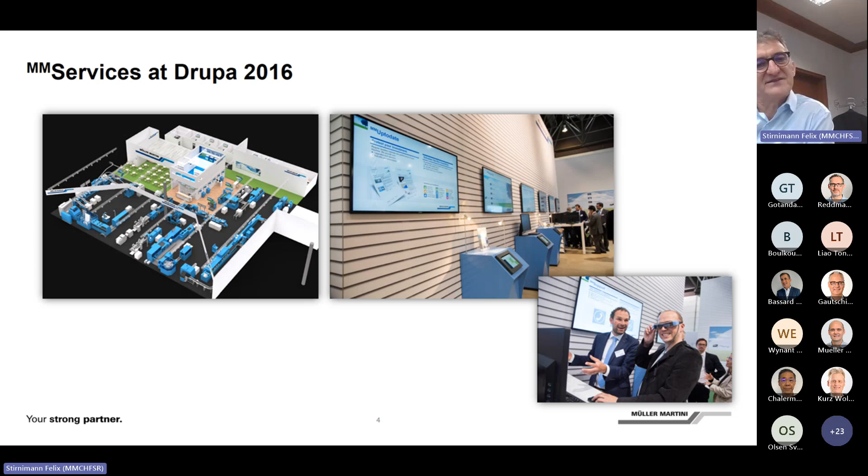Nowadays, we are close to 45% of our business, of the total revenue, what we do in services. So it's something that really is important for our business. Because of that, we invested heavily over the last couple of years.

When you look, we have this chart, this service journey table here. I have it hanging here on the side in my office, and you can't read it. But you see that since 2010, every year we had new inventions that we introduced, new products, new solutions, new tools, new processes. And this was all combined with a lot of investments that we did just to make our product, our services, our structure and processes better.

And this was all to follow our vision that we want to become a first-class service for the graphic arts industry. This is our vision, that's what we want to be. And then we have as well, on the other side, a promise of MMServices that we can say to our customer that our focus is on your success, and we help you to maintain your productivity over the long term.

And this we trained, and it was backed with our service excellence program, our services commitment that we developed together with our service engineers and with the whole service force, where we said we have 4 bullet points there. We said we need to have satisfied customers, we have a strong relationship, we are the expert and have the know-how, and we understand that service is a business.

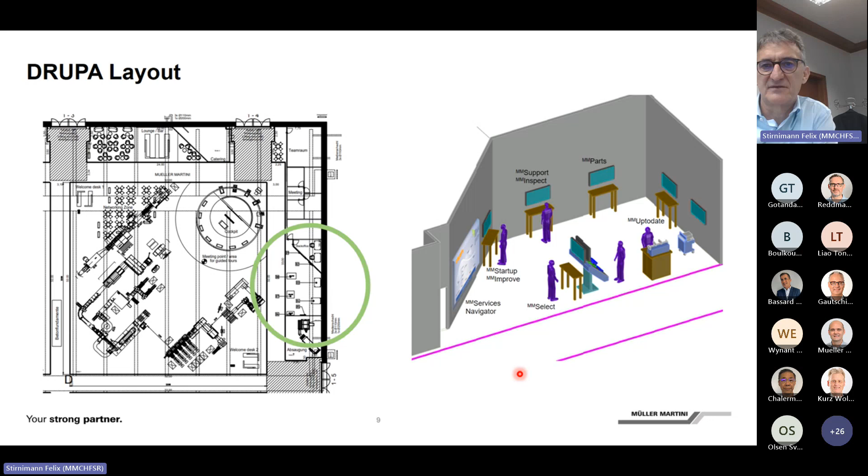And then as a final position, you have Select as well, where we want to close business or generate business. That will be the post then to do that. Here to show what we can do, and then here to generate business. Now we have a new slightly adapted navigator, as you can see. And the navigator still consists of our hills, the 3 hills that we have here, and all the products. It has now the life cycle management, we have the MPOWER in it. And on top, it has our vision, our customer promise in services that we have listed here.

Maybe just that you understand the logic of this chart. We have here a curve going up and down, and this shows the capability, the output, the quality capability of our machines, and after a startup and installation, how it is rising. It shows the various products that we have along the life cycle, the major products. And then we know that at a certain time, the capability of our machines is dropping.

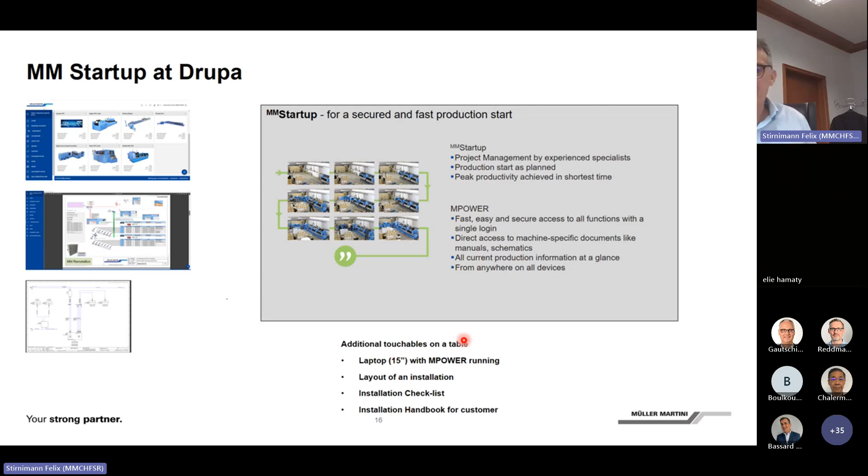And with that, I would go on to the next label, that's MMImprove. Here as well, the customer side. What keeps the customer awake at night in terms of training? Next year, I will have 2 operators retiring. Ooh. What needs to be done to get more out of my line?

So they are searching people all the time. They have a lot of people coming in. They have to train them. They have questions how to bring more out of the line, or will they find someone to run this really old machine like that? So the question is, how can I keep Leo on my 25-year-old binder? Because he's really my best binder operator.

And now the answer is clear. Buy a new machine, make it more sexy, make it more productive, such a binding line. When you bought this line, then the question is, can Leo handle this new PublicaPro technology? It's really a new investment. So how can he handle that? And will he bring out 100,000 books a shift already in April? Because that's what I sold, that's what I planned for.

So there are a lot of questions around the capability of the people running the machine. Now, here again, what is our approach to do that? And with that, I will switch over to Christoph. We swap places here.

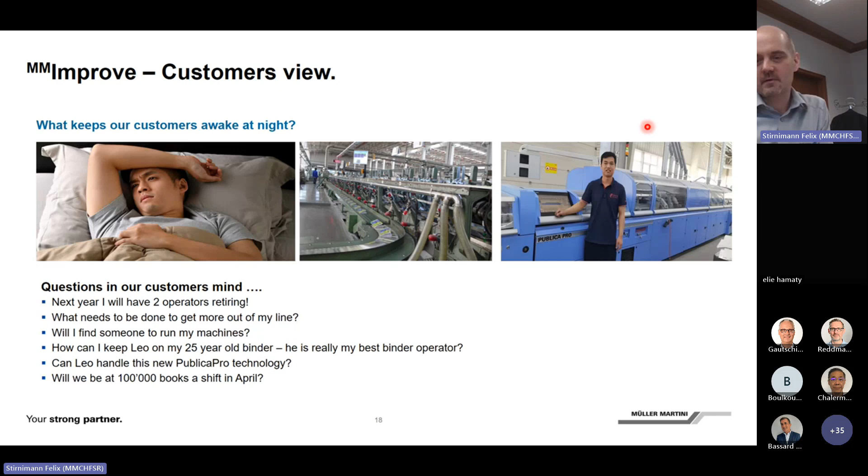Okay, what do we have for MMImprove? What is our approach? We are ready for training, demos, and tests in the new print finishing center. Let's take a look at this.

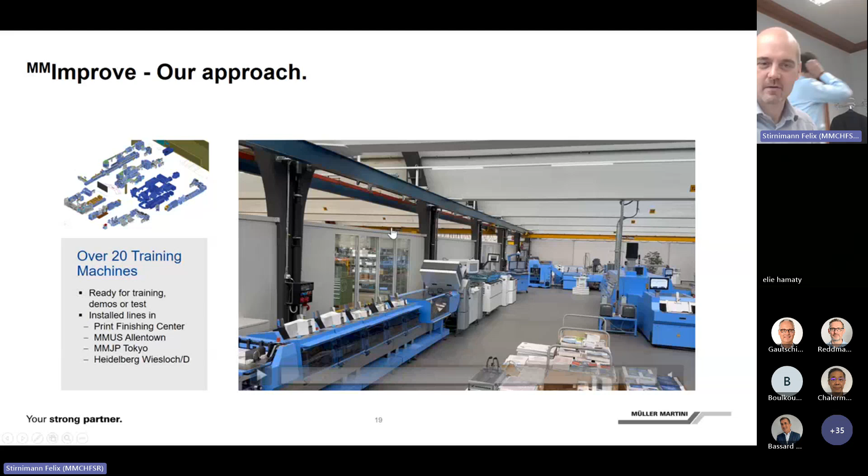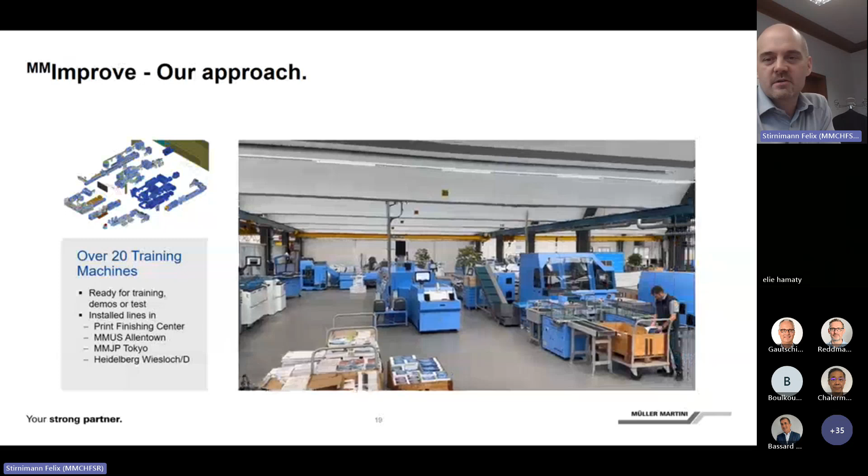Let's take a look into our new print finishing center with all the lines which are installed. We have more than 20 machines in our training centers. They are installed in the print finishing center in Zofingen, which we see here, at MMUS in Allentown, Müller Martini Japan in Tokyo, and as well we have a machine in the Print Media Center of Heidelberg in Wiesloch, Germany.

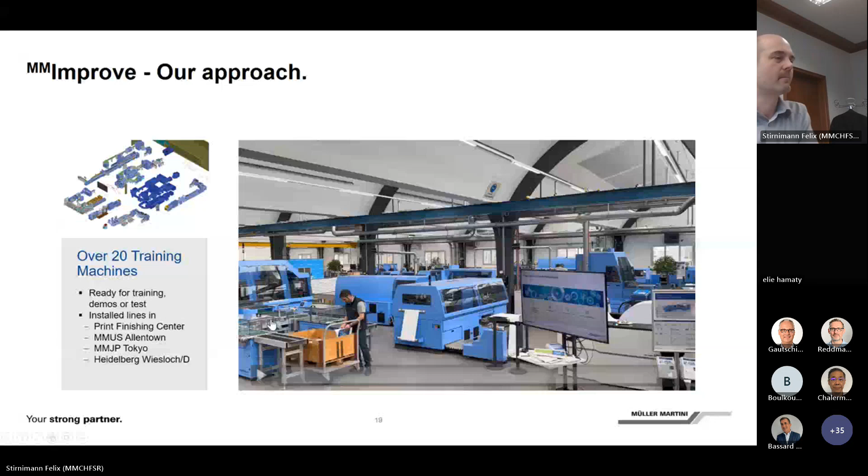We have a lot of experienced trainers, over 10 full-time instructors in Switzerland and Germany. The average experience is more than 25 years. So if we look at the age of a saddle stitcher in Germany, I think the average over there is the same as the experience of our trainers.

We have a modular training block, one for customers and the other one for Müller Martini engineers and agents. We have a fixed pricing for the training in the print finishing center. This is 500 Swiss francs per day and person.

If we look at the modular training block, for the customer, we have the basic operator training. That's just to build the base on a certain machine. And then if he needs to get deeper and get more experience, we also have the advanced operator training. But we always start with the basic, even if a customer already had a saddle stitcher, because on the basic operator training, you get to know the basics of your new machine.

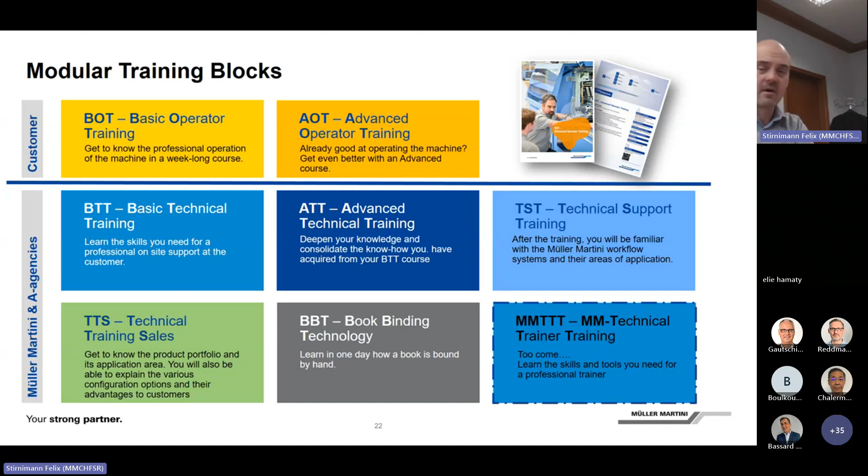And to come is the Müller Martini technical trainer training. This we want to bring up to train our local trainers, or the trainers around the world who do more trainings, so that they can deepen their knowledge and also understand what is important to bring over in a training class.

We have a streamlined training process, so you are well prepared for the training. It's a structured weekly training program. We also do a feedback loop, so you get a feedback form at the end of the training and a certificate for the participants.

So we see over here we have the training course invitation and confirmation, the schedule on the back side. There's a welcome package for everyone who joins the training here at the Print Finishing Center in Zofingen. Then they receive a feedback form which they have to fill out in order to check if we can do anything better. And last but not least, the training certificate of the specified training.

If you look at the print finishing center, we have a very nice infrastructure over here. We have separate and clean areas where we can go back and do theory blocks, as well as the practical blocks on the machine. It's clean, it's organized. It's not a production environment where the people have to run away. So we can really take time and look at certain things.

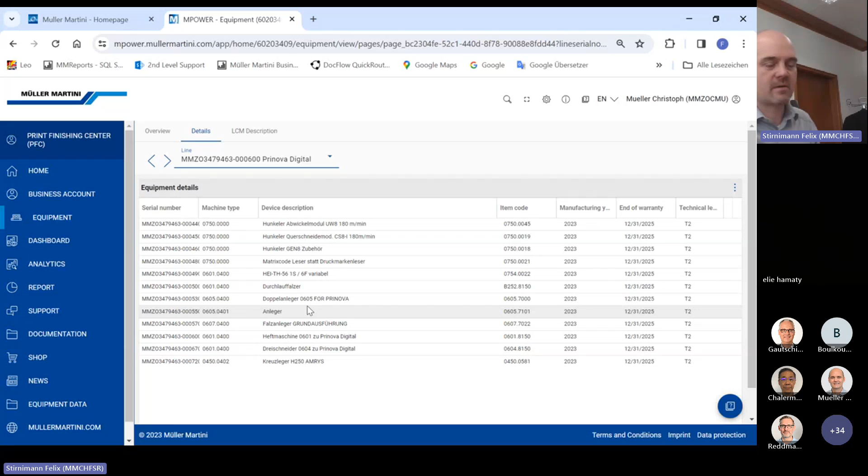Then we have the end of warranty and the life cycle status. That's all displayed per machine or per line. Under details, I find a list of information, what I have. Let's take a look at Connex. Under Connex, I see all the licenses which the customer has. Or let's go to the Prinova Digital. Over here, we even have the Hunkeler Unwinder, the Hunkeler Crosscutter, and the Heidelberg folding machine. So we exactly see what models or stations consist in this line.

As well, we have the document which was already shown by Felix to begin with the service navigator, so the lifecycle management sheet where the customer also sees the waves with the life cycles below and what they mean. What does secured mean in case of MM support or up to date and so on. So it's a clear communication between Müller Martini and the customer. We don't hide anything. So whenever we change a life cycle of a machine, he will see right away the next day that his life cycle changed. So we have nothing to hide.

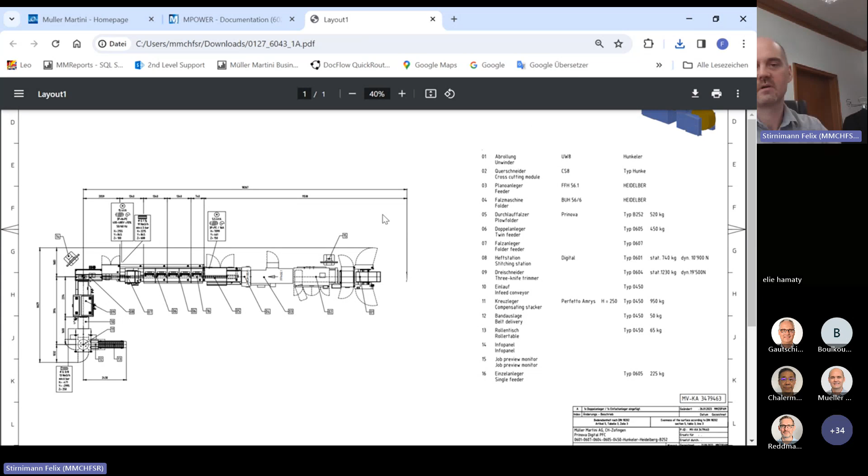Then let's go down to documentation down here. Under documentation, I would like to start with layout. Under layout, we have the assembly layout of the machine. We have two buttons over here. One is opening up right now in the browser, directly here. Or on the right side, I can also download the file as a PDF. Download it. It will be available on the downloads, or I simply click on it, and then I have it. So that's the layout of the Prinova Digital assembly layout.

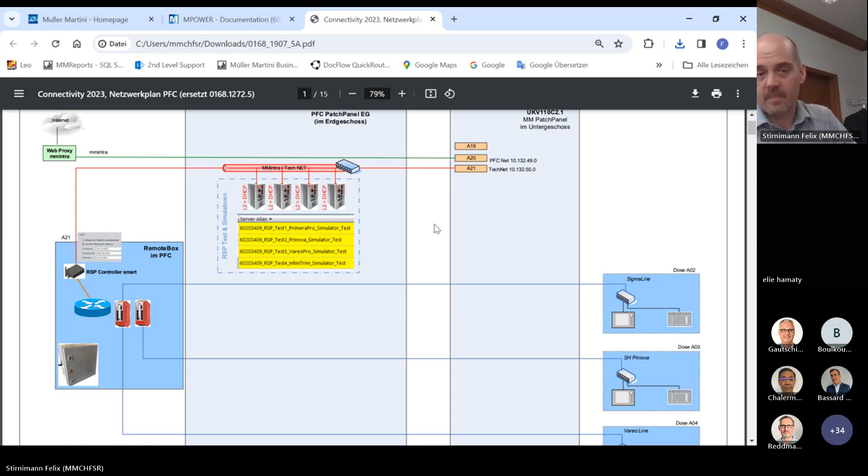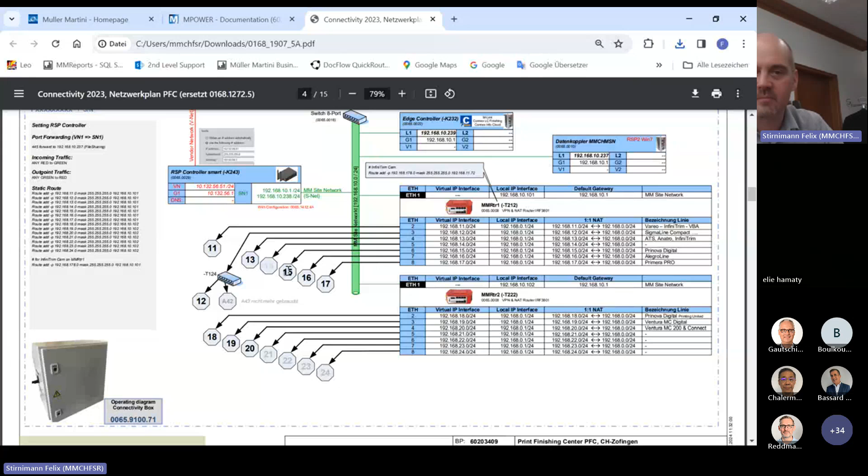Most important these days for service reasons is definitely the network diagram, because in the network diagram I find all details how the machines are connected or what are the IP addresses. So we have an overview here with all the network blocks. Then in the connectivity box over here with the firewall router, which machine is connected to where. So we want to take a look at the Prinova Digital on page 9. Let's go there. 9 here, Prinova Digital.

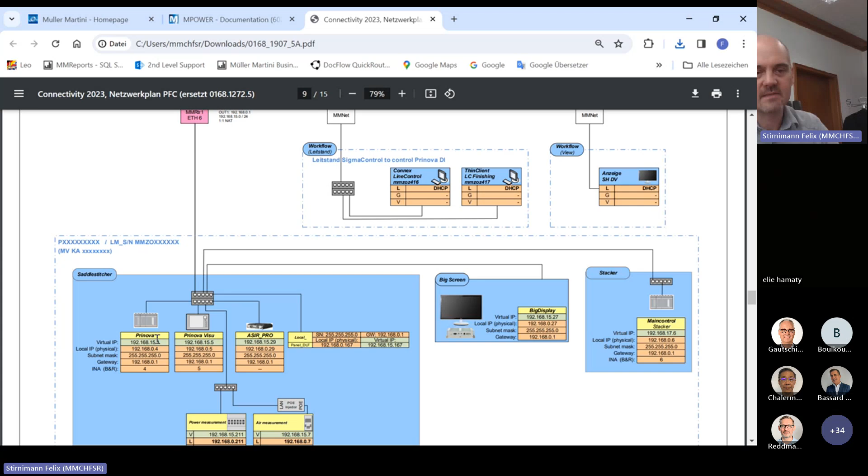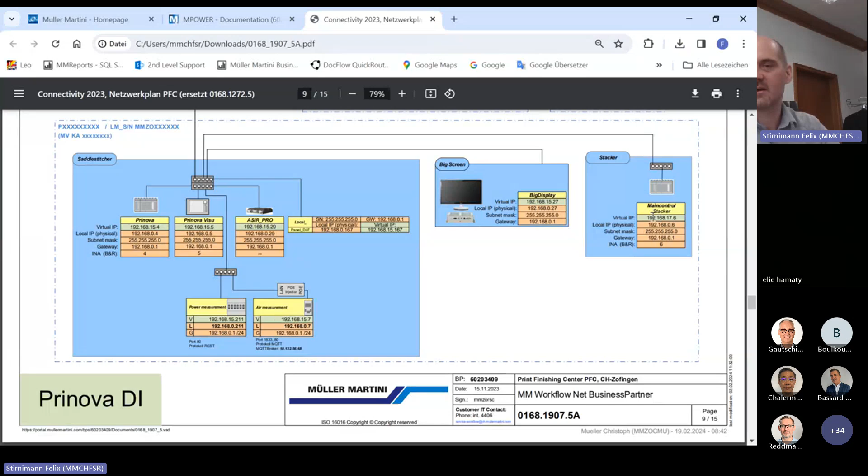There we see all IP addresses of the Prinova, of the main terminal, the ASIR Pro. We also see that we have a power measurement and the air measurement tool where we measure the power and the air consumption on this machine. The info panel and the other machine, the stacker, Perfetto in our case, with its corresponding IP address.

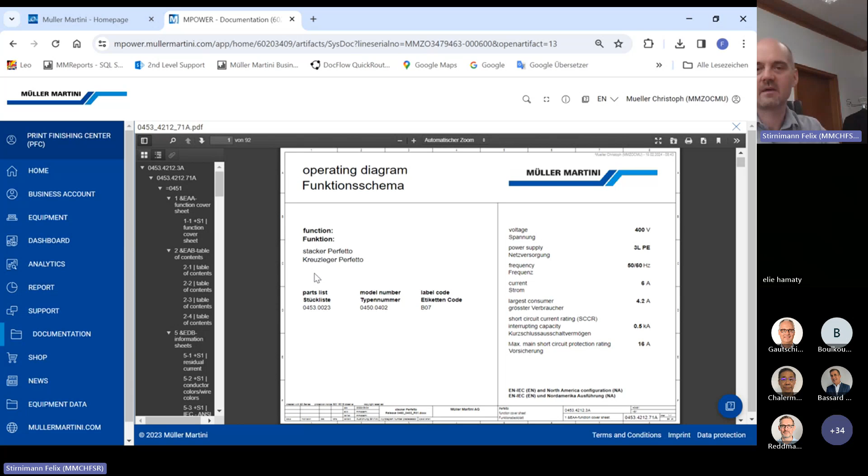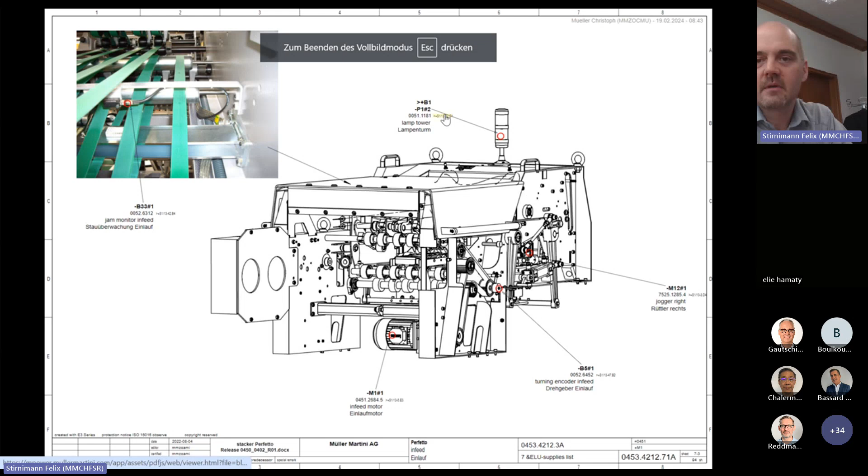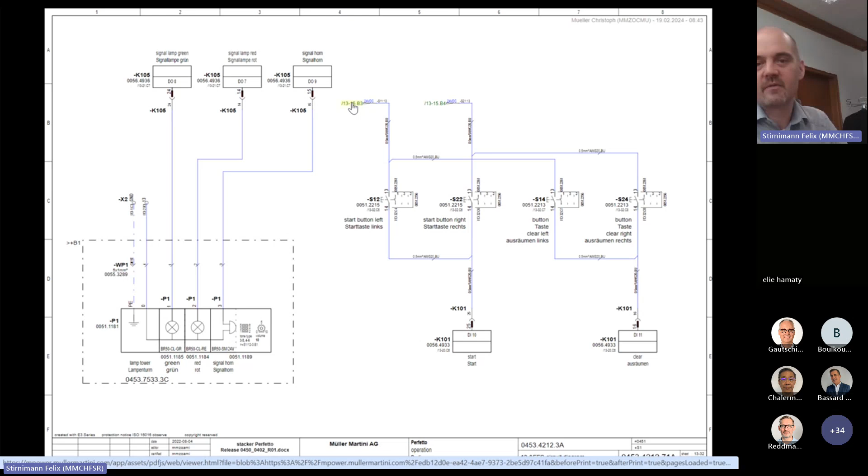Under schematics, we have all schematics for this line, so for the saddle stitcher and as well the stacker. Let me open that up this way. There we have the schematic of the stacker. And do this one, make it a little bigger. Then we can jump because I want to check the light bulb of the stacker here. And then I get right to here. And there I have the information about the green light and the red light and the number for the light bulb or the entire lamp as well. So with all these, you can jump somewhere to get to the corresponding part. Good, that's the schematic.

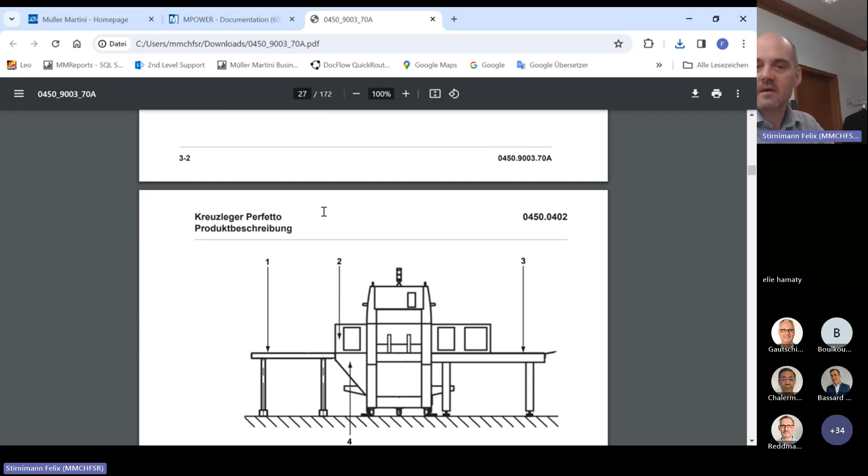Then let's go to the manuals. Under the manuals, I have the corresponding manuals for that machine, as well the Prinova itself or the stacker. Let me open up the stacker. This time I download it again. You see you have the two possibilities. You can download and it opens up the PDF in a separate browser, or you can open it directly in the MPOWER browser.

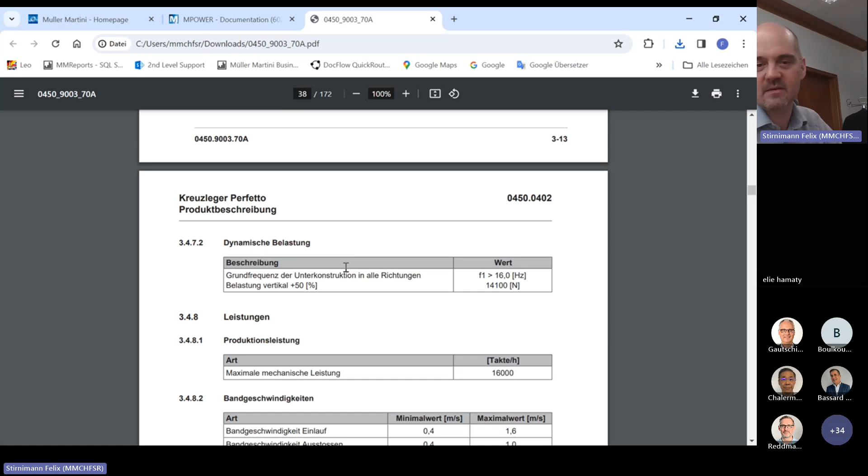The description about the serial numbers and so on. The corresponding manual in the correct language of the customer. In our case, the print finishing center is in Switzerland, we speak German. That's why we have the corresponding German manual of the Perfetto over here. Good. Then let me close this one as well.

Now I would like to show you spare parts documents. And for this reason, I log out real quick as my account, and I log in as a customer, as the print finishing center. And then I real quick explain the differences. That's a customer login.

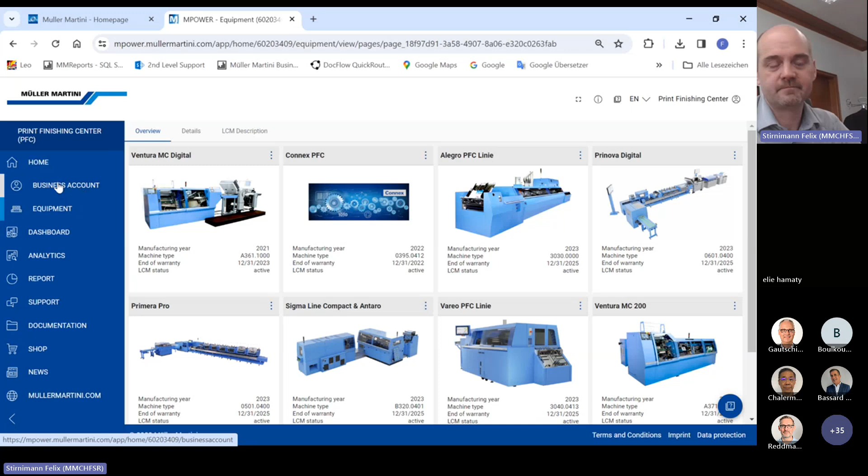Okay, over here you see I don't have the overview of all machines. I just have it here under equipment. That's the same, but I don't see which machines I had. I just have the overview of my installed base right now. Then on the business account, this is the same. I see the users which I have, and the rest looks pretty much the same.

Let's go down to documentation, and I select again the Prinova Digital, go to the spare parts, and we now open here on the Stitcher. Over here I have two different spare parts catalogs. One is the old one. Let me open that up real quick for you, so that you see how this looked. That was just a normal PDF. It was quite hard to find the correct part in here, because you need to know where to go first in order to figure out what you're looking for.

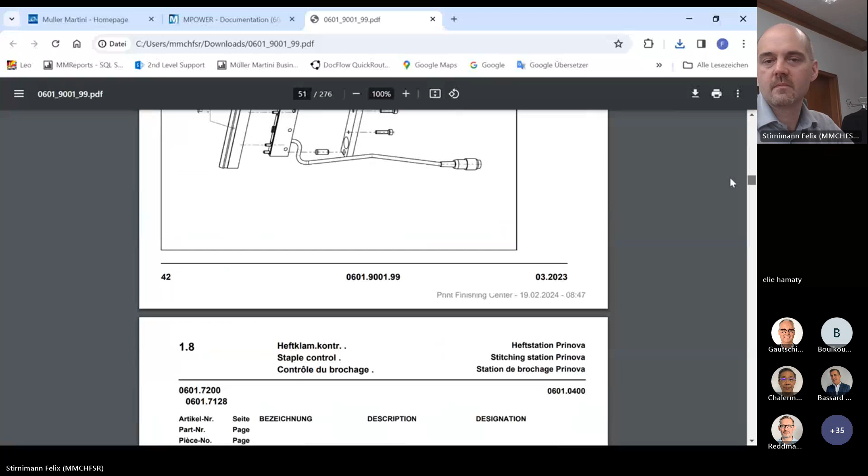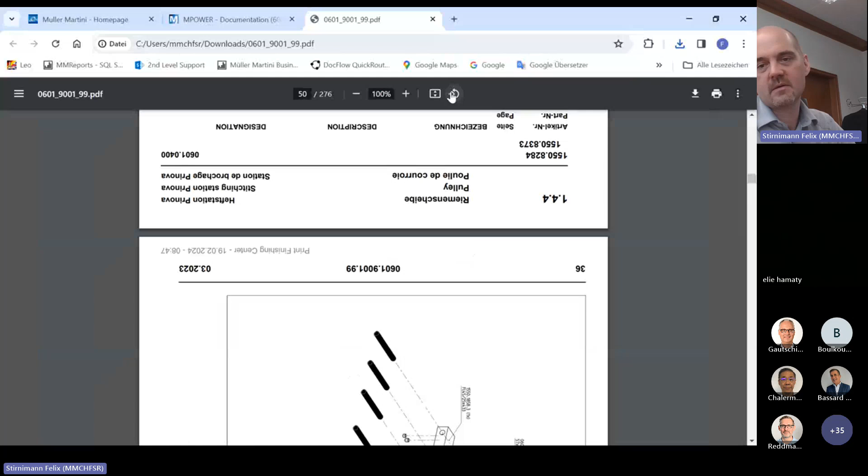And then you can see many of the drawings are turned, so you need to turn them. Now I just turned it the wrong way. So it's quite hard to figure out the part, and you need to think about that part, note it somewhere, in order that you can order it. Okay, let me close that.

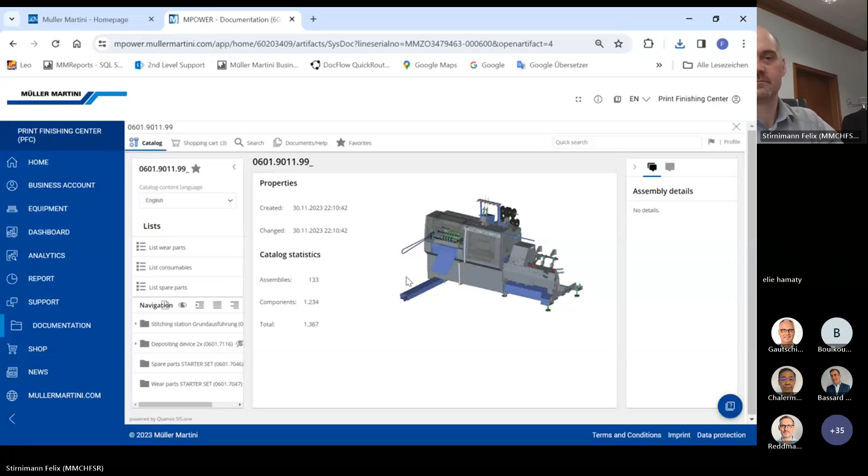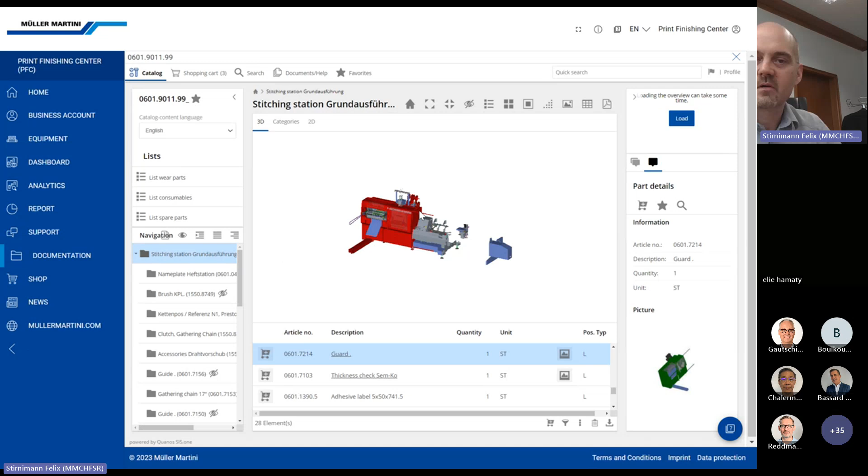I open now this 3D spare parts catalog of the stitching unit, and I make full screen view. Now, if I'm looking for something, if I need to remove covers over here because I can't find that part, I simply click over here. Good. Then I know it's below there. Remove the cover. That's what I'm looking for. I want that scale.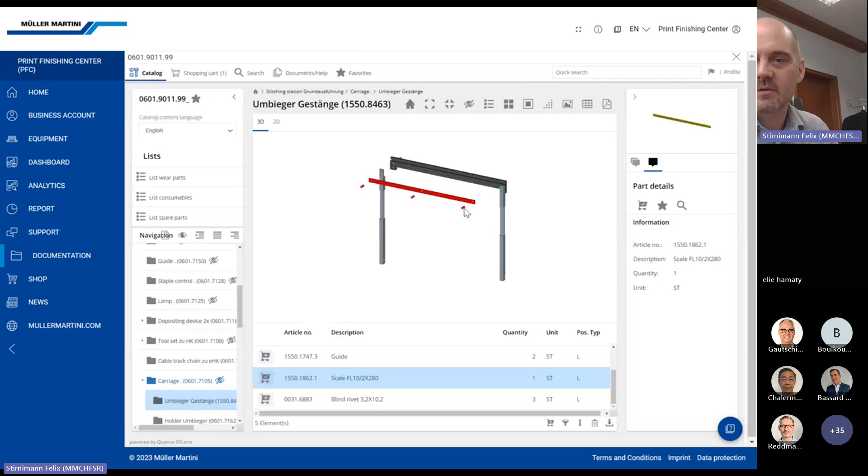Add to the shopping cart. Oh, I have already one in there. Let me first delete my shopping cart, so we can start from scratch. Okay, let's go back to the catalog. So I want to add this. Then I want to add these rivets.

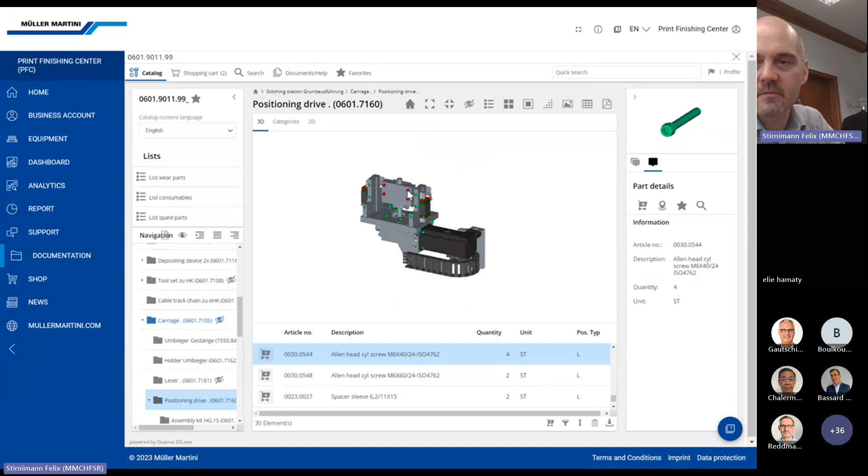But then I can go back. And maybe I just order these screws. Then I say I only want one. Add. Now I have it here in my shopping cart, all the parts I added. I can say save to eShop. Then I go to the eShop.

And this you can only do if you're a customer. With your login, you will be able to save it to a shopping cart, but you won't be able to import the data on the eShop because you're not a customer. Now I have this import data where I can choose a file. So select here. Then it goes into downloads of your PC. Downloads, over here it is. Shopping cart as an XML. You can select it, open, and then upload.

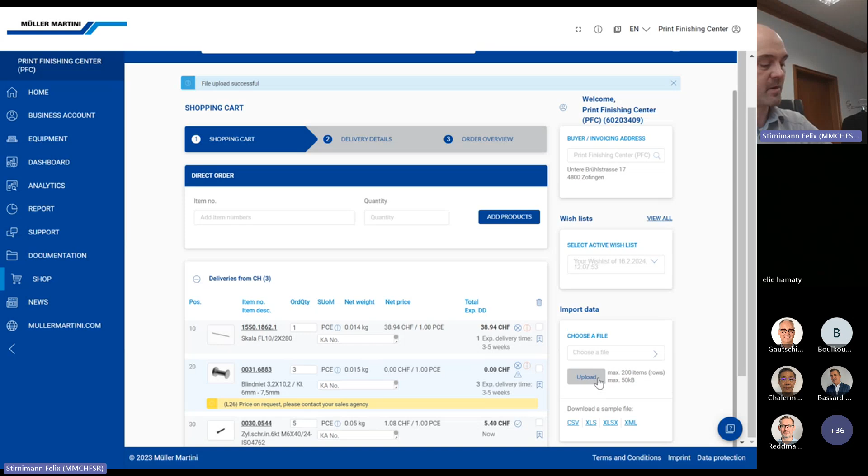Now it's checking the availability of these parts. And we can see it here. The scale, that's the unit price. Expected delivery time, 3 to 5 weeks. Why don't we have this scale? The reason is simple, because this scale is not a spare part. We use that daily once we build up a Prinova Digital, so we have it in our production stock room.

And then it will change. If you order it or if you call, you will figure out that we have that part available and we can deliver it right away. So it won't take 3 to 5 weeks, but it's not a spare part. It's not in our spare parts office.

Then the rivet pin over here, we have the information: price on request, please contact your sales agency. It doesn't make sense that you order that, because you need a rivet tool to put that in. And this rivet tool the customer usually doesn't have, but our service engineer does. So our service engineer would bring this rivet tool and then would be able to exchange the scale.

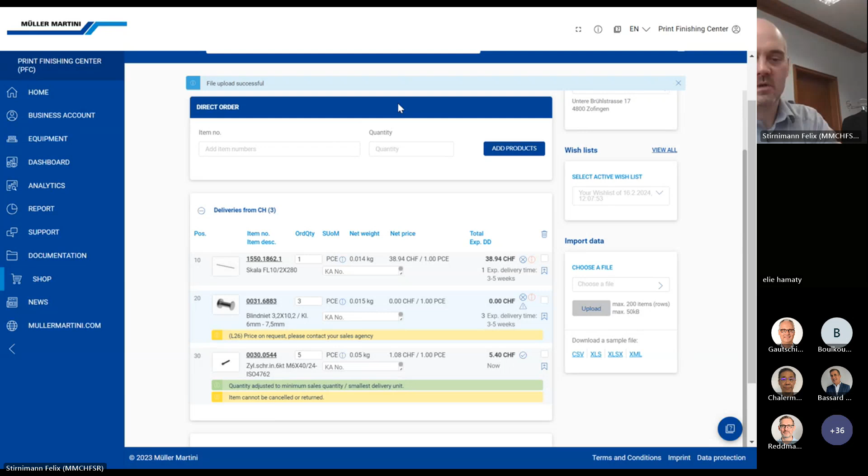On the screws over here, I only wanted to have one screw, but the quantity got adjusted to the minimum sales quantity. So I need to have 5 of those, and this item cannot be canceled or returned. Okay. That's on the eShop side. So we have the price, the delivery times, and uploading or import data. Import data and prices is only for customers. Then let me delete this shopping cart right away.

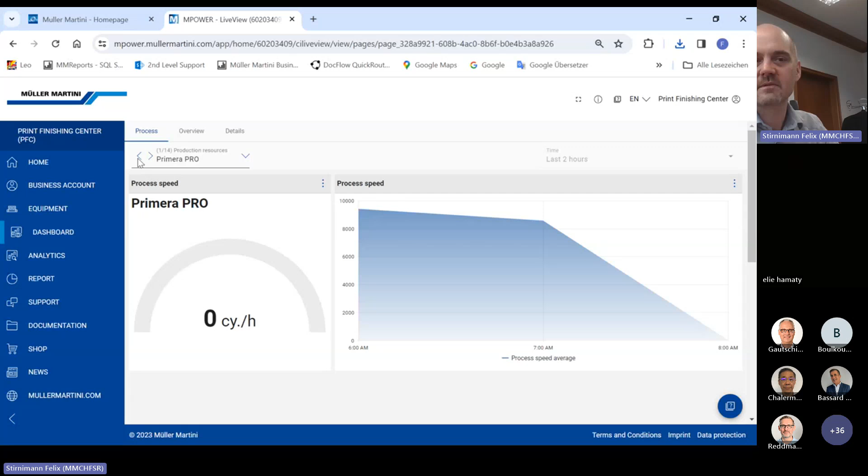And now I would like to show you as well in here our 3 modules which you have to purchase or where you need a license. Dashboard. This first one you get, because it just shows the process speed of a machine for the last 2 hours. In our case, the Primera Pro. You just see the speed of the last 2 hours.

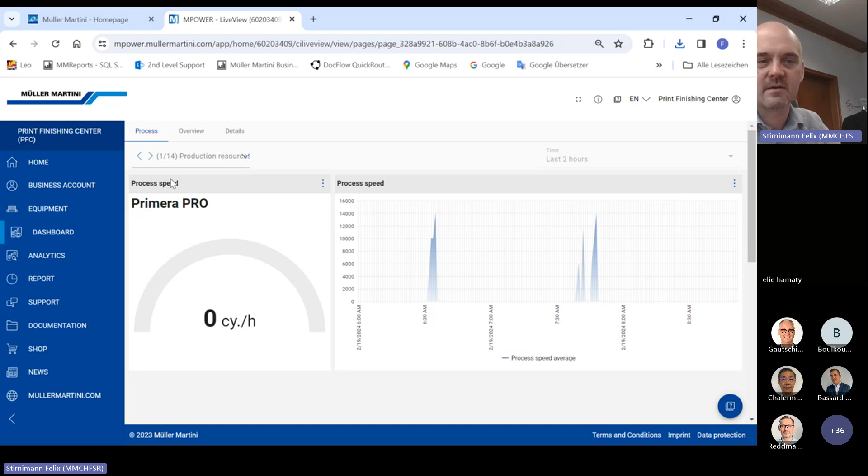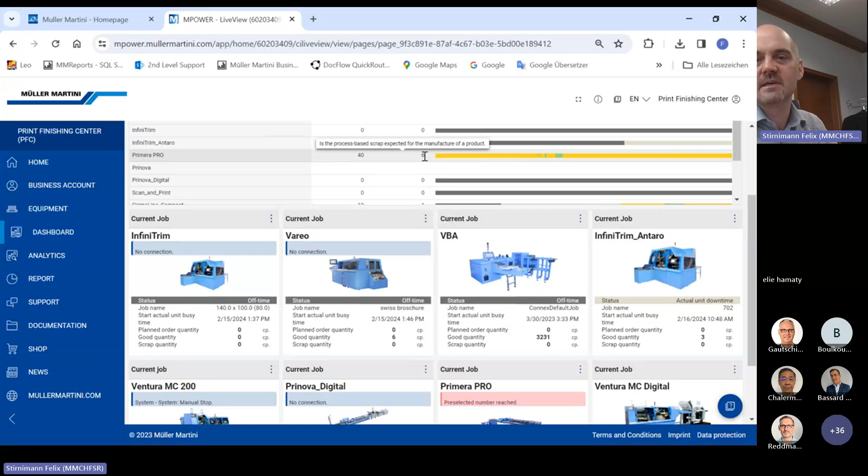Under the overview, you see the last hour of your plant, of all machines, of all production resources. You see what was going on. For example, here on the Primera Pro, the last hour, 40 produced, 6 waste. We have productive time and we have stop time. And as well, you have each machine in the details where you see the planned quantity, the good quantity, and the scrap quantity.

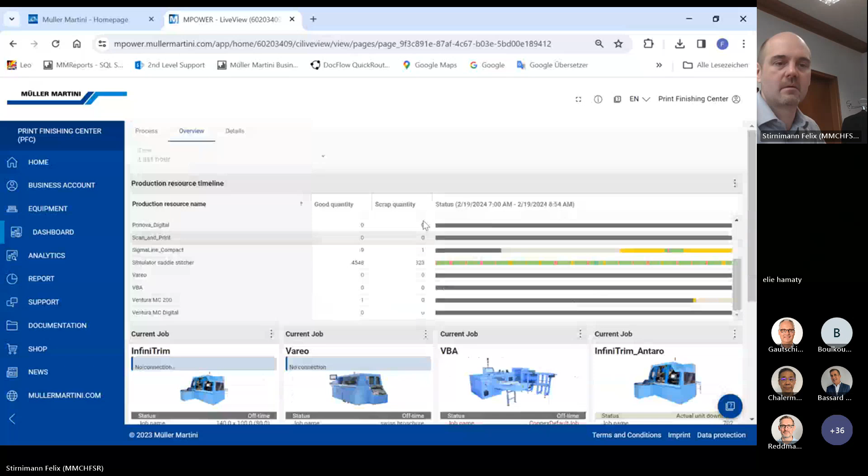On the details page, you have even more information about the machine from the last 12 hours. You can also select or change the machine or production resource you want to look at.

Let's go real quick to analytics. Under analytics, you can also analyze a machine. First we need to select one - let's take the Primera since we used that just before, and let's go to the last week. Over here we see the time accounts, the top faults, how many times they occurred, what was the duration. We see the top stops, the good quantity, speed classes, and so on.

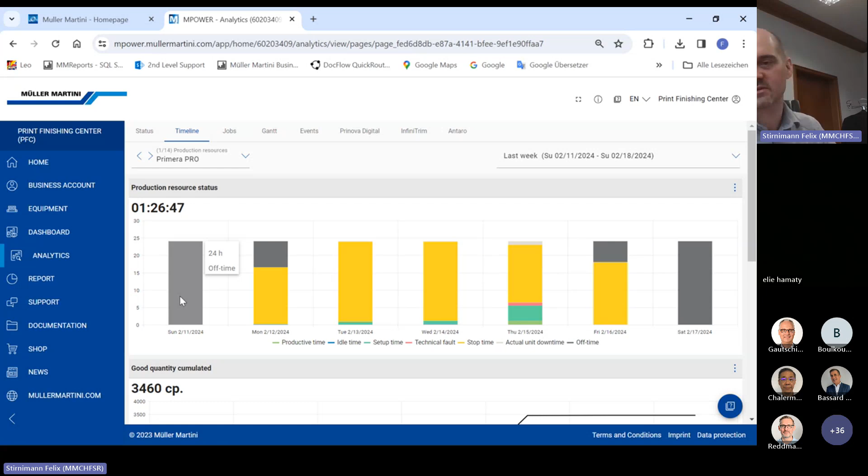There we have a lot of different views of each machine. For example, here the status within a week - when was it produced, when was the production, when was it stopped, when was it off. Unfortunately, on the weekend. The good quantity accumulated, and so on.

Last but not least, I would like to show you on the report - one report. Over here we have a couple different reports we can take a look at, but the one I'd like to show you is the trend report of this production line. The trend report shows us some important information - how we did in setup, how we did about technical availability, how we did regarding produced numbers, how we did about production performance, usage of the machine, and how we did in errors - did we get more errors or less errors, and so on.

Takes quite a while to download this. Very long, unfortunately. Now we got it.

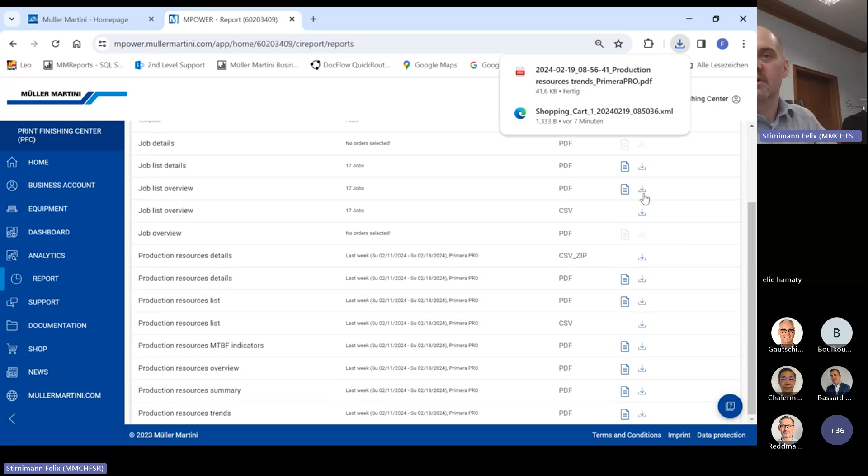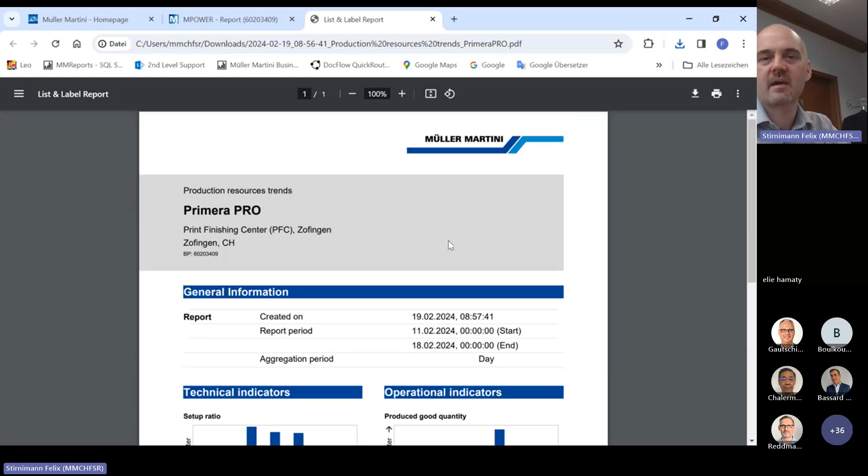So this is the trend report. I see when it was created, the reporting period. The aggregation period is per day. I see over here setup ratio, the technical availability, the produced good books - it's getting better. The production output is also getting better. The utilization efficiency is getting better. And the MTBF for faults is getting worse because it's trending down. So that's the information we have on this trend report. And as you can see, there are many other reports which we can generate.

Okay, that would be it from my live demo. Let me just log out over here, and then I'll hand over back to Felix. Close that all out.

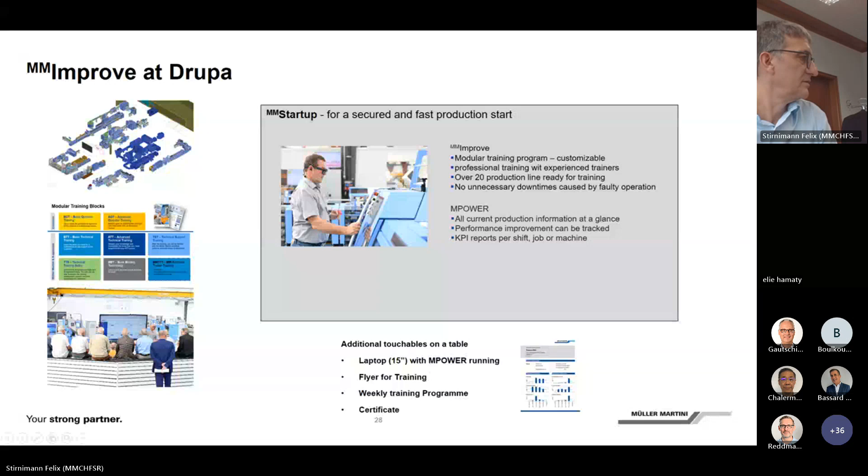Should appear, huh? Now it's coming up. Good. Very good. Thank you, Felix.

So now we are at the MMParts training for the Drupa 24. My name is Roland Gautschi, I'm the manager for parts. I will be supported by Marie-Therese Hilpert. She is responsible for eShop and pricing, and we will do this presentation together.

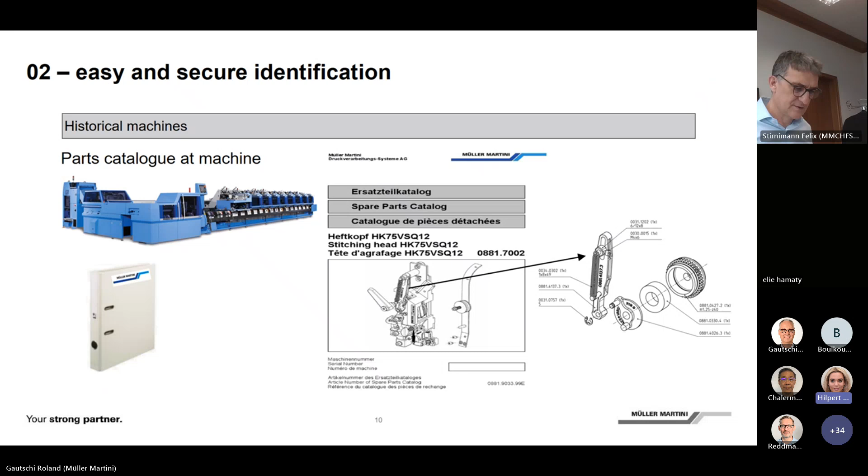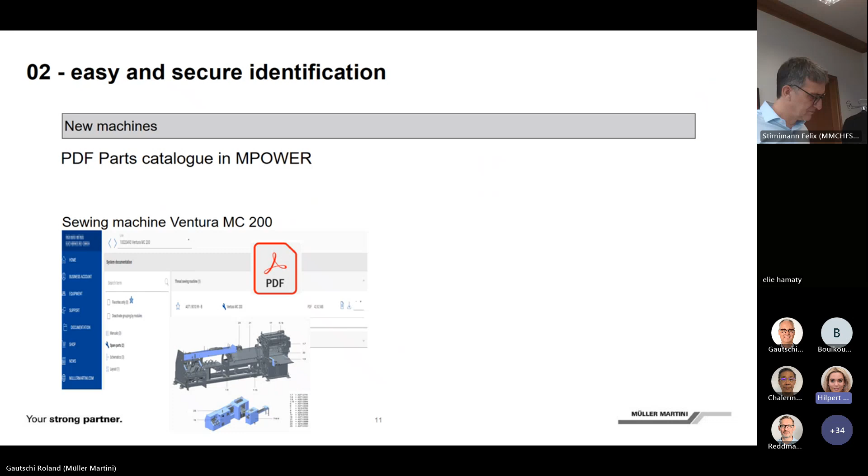The customer has several options regarding pictures to identify his required part. We have camera pictures, single as well as 360-degree pictures, and we will make these kinds of pictures for commercial parts as well as parts with high consumption. On the other hand, there are CAD rendered pictures, which will be taken for drawing parts with low consumption and low value parts such as screws and bolts. The customer also has the opportunity to download documentation for some parts.

Now, to show you more in detail, I will enter the eShop and show you a few pictures and the mentioned documentation.

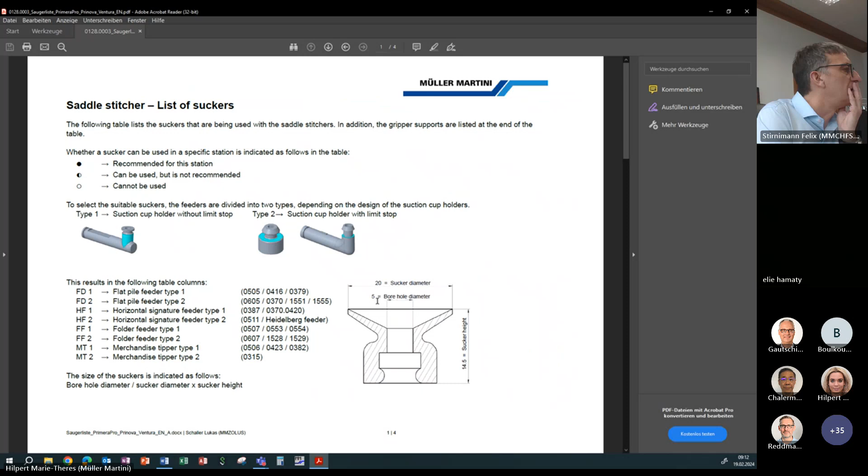Okay Roland, can you show the presentation again, please?

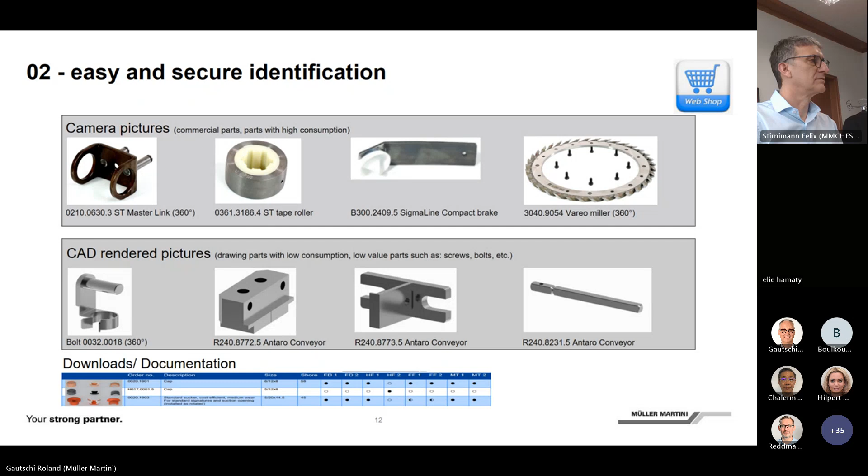So the eShop also helps the customer get the correct part he needs. We have more than 30,000 items with one-to-one succession. If the customer enters a part in his shopping cart that has been replaced, a green message will pop up letting him know that the part has been replaced by a new part number.

Furthermore, we have more than 2,000 items which have a one-to-many succession. If a customer enters such a part, a pop-up in red appears telling him to replace the part with the following part numbers, as you can see on the right-hand side.

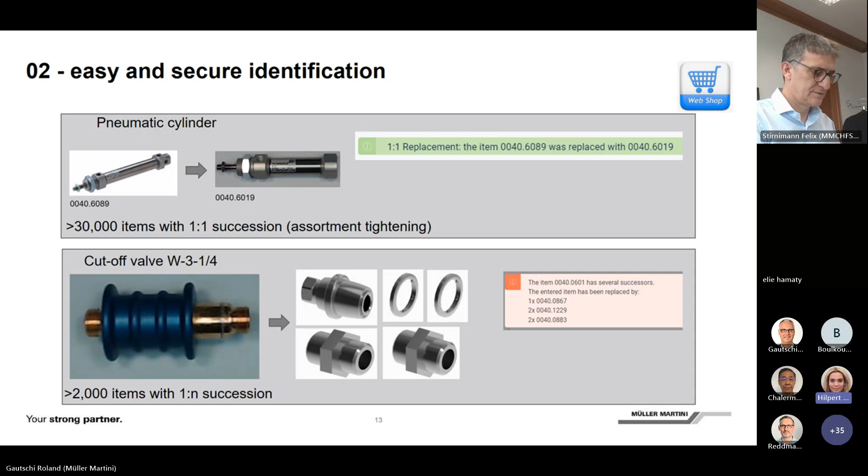Then back in MPOWER, on this equipment page, items can be chosen on the screen, for example, and all the relevant information about this part is available. As an example, if the customer clicks on the signal lamp in red, he can see on the right-hand side all the relevant information about it.

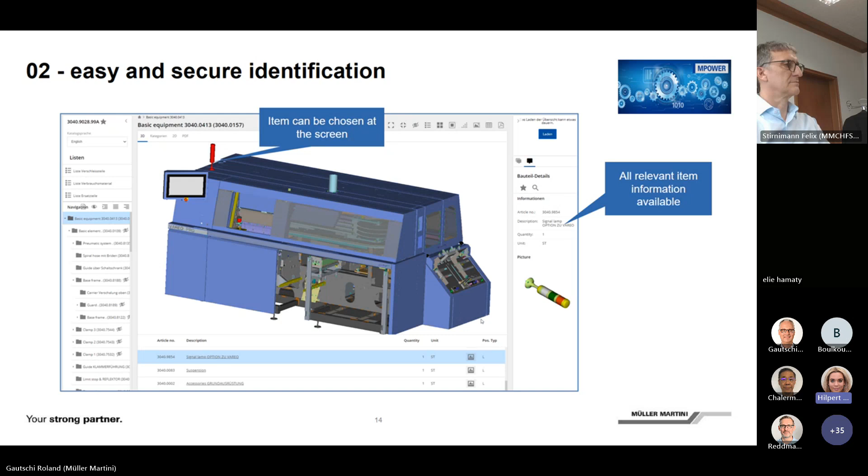If the customer still does not find his desired parts, we have a first level support provided by the market organizations. The second level support consists of 12 employees located in Zofingen, Felben, and Raden. They clear more than 600 technical clarifications per month. This service is free of charge for the customer, and more than 80% of all clarifications are completed the same day.

And now I will hand over to Roland again. Thank you, Marie-Therese.

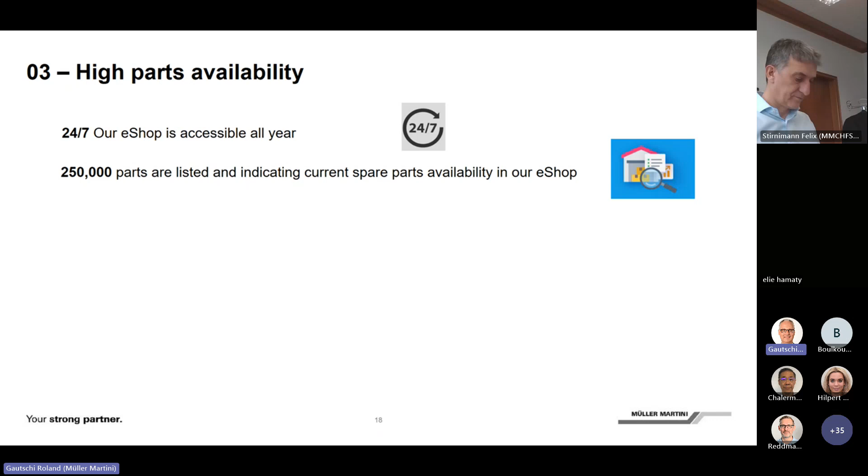Okay, now we are coming to the high parts availability. As I said, we are really good at supporting you with parts. We have our eShop, accessible 24 hours a day, 7 days a week, all year for our customers. We have more than 250,000 parts listed in the eShop indicating our current spare parts availability. We have 100,000 various parts in stock, ready for logistics. This is the mentioned 100 million Swiss francs that we have invested in parts.

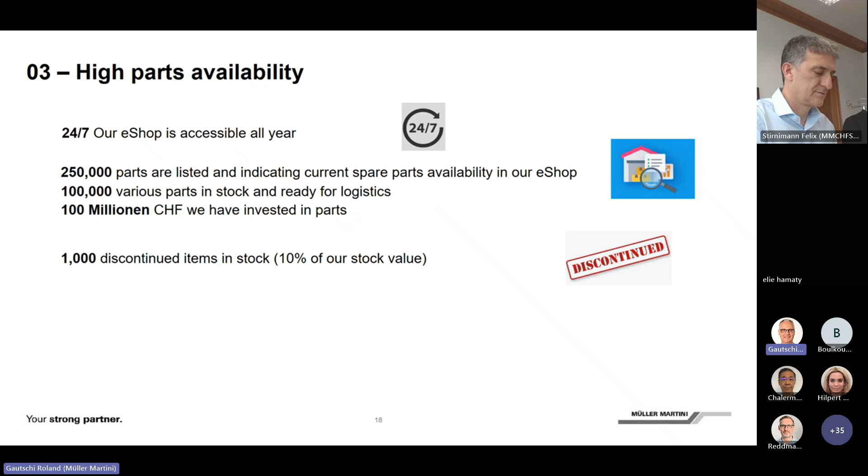Besides that, we also support our customers for discontinued parts. With so-called last buy, we have more than 1,000 discontinued items in stock. These items have a worth of 10% of our stock value. If the customer needs more help, and even though these discontinued parts are not available anymore, we have a repair service for our customers, or we do refurbishing for items we have in stock for such parts.

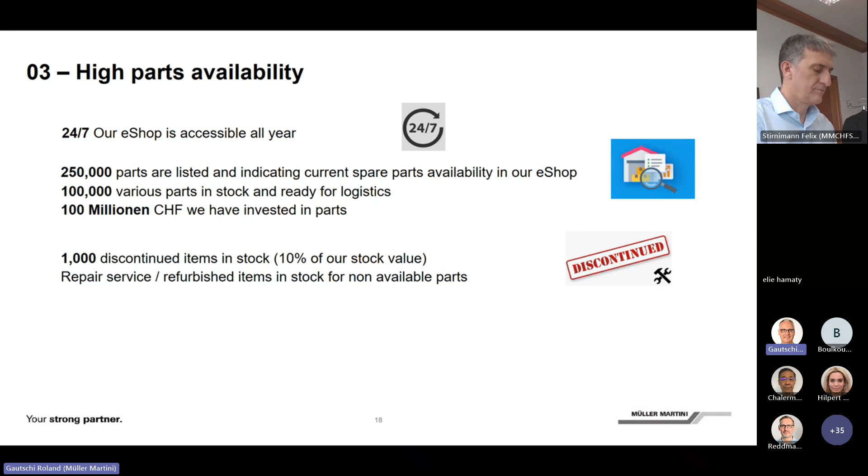Now I will hand over again to Marie-Therese. She will show you briefly again in the eShop about availability and visibility.

Thank you, Roland. So this is actually something that we have seen before from Christoph, but I will show you again. We have these 4 parts in our shopping basket, and you can see now that I have the order quantity of 50 pieces there, and 34 pieces are now available, and the other 16 pieces have an expected delivery time of 5 to 7 weeks for this part. And for the bolt here, 80 pieces are now available, and 20 pieces show an expected delivery time of 1

to 3 weeks. But there's also a third possibility: if, here for the spindle, we already have a confirmed delivery date from our supplier, it will also appear here in the eShop. So this spindle has an expected delivery date of the 27th of February. And of course, if a part is available right away, it will just show you that the part is now available. So these are the possibilities regarding the availability in the eShop.

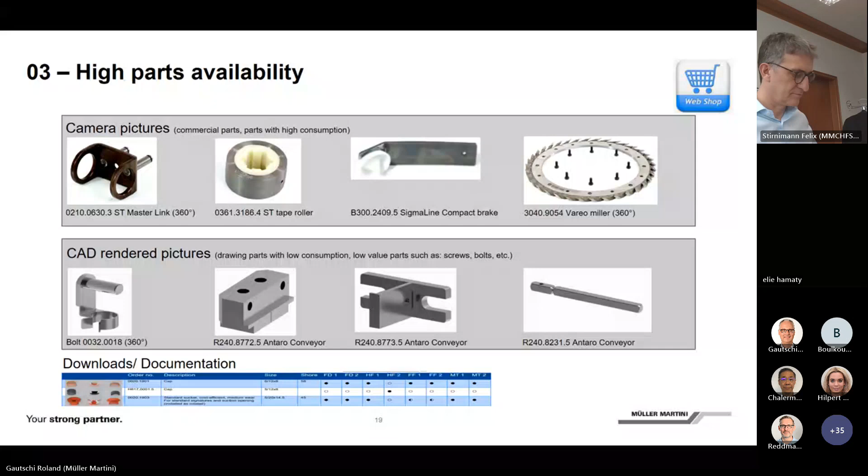Thank you, Roland. Thank you. Marie-Therese, you can actually take over. Thank you. Yeah, thanks. Good.

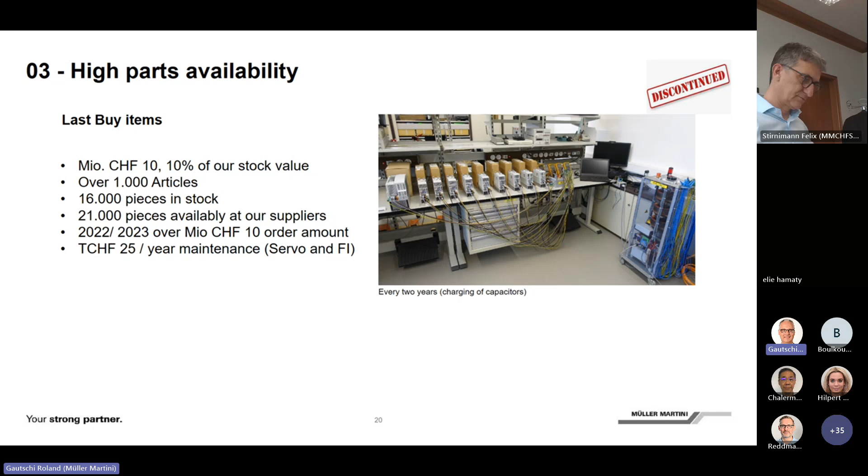This also costs us a lot of money, and for servo and frequency inverters, we are charging the capacitors every 2 years actually, and it looks like this in the right-hand picture. Here as an example, you see 3 typical items. 2 are from Lenze, a servo converter 9300 as an example.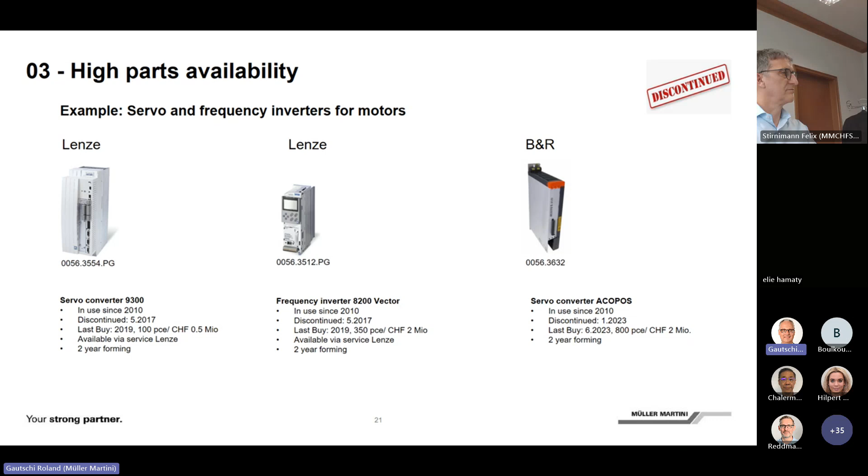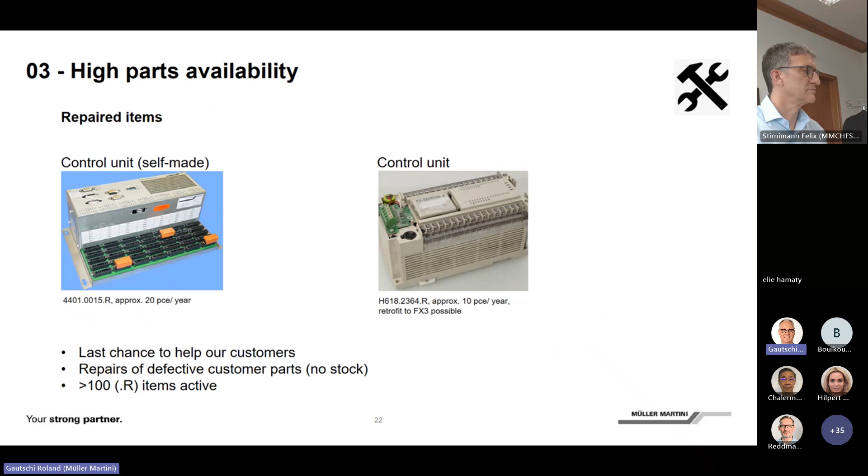As a last chance to help our customer, if there are no parts available anymore, we have the possibility to repair the items. We take back the defective customer parts, we repair them and return them to the customer. So we normally don't have these in stock. More than 100 part numbers with that .R are active and are supporting our customers. Here are 2 examples for control units and the average consumption we have per year.

This indicates the availability of parts for frequently used parts with a frequent consumption. You see that we have our target line at 91%, that we have the parts in stock. We were there more or less in 2018 and the following years, and then got hit by the coronavirus. We really had problems with the supply chain. You see that in 21 we went down with the performance, with the availability.

We could increase the numbers a bit again, but then got hit by the war in Ukraine. But since mid-year of 22, we ramped up again and are now above the target line again to support our customers with a high availability from stock.

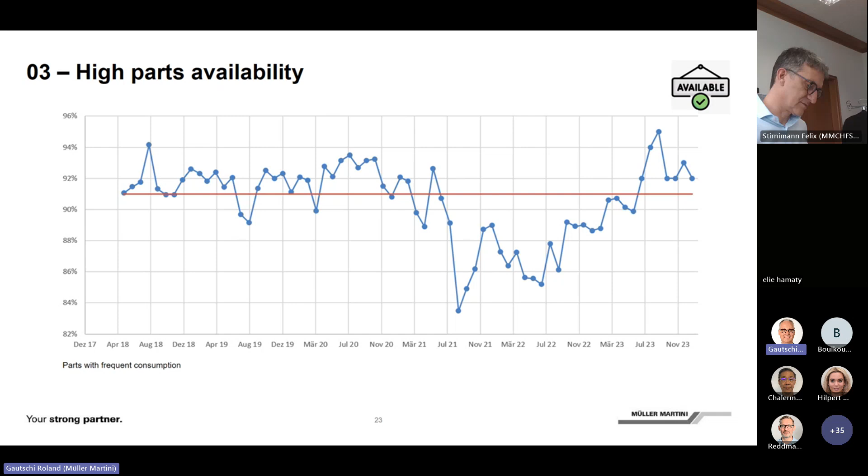Besides that, we are also closely looking at the life cycle status of the machine. So when we have active, sales active, service active or secured machines, then our target to support our customers is higher than on the limited or obsolete side.

We also distinguish between a high demand of parts and a low demand. With the high demand, we normally have a prognosis behind it that makes sure that the part is always in stock. With the low demand, we also support, for example for the active machines, that we can take a part from the factory stock, as Christoph already explained.

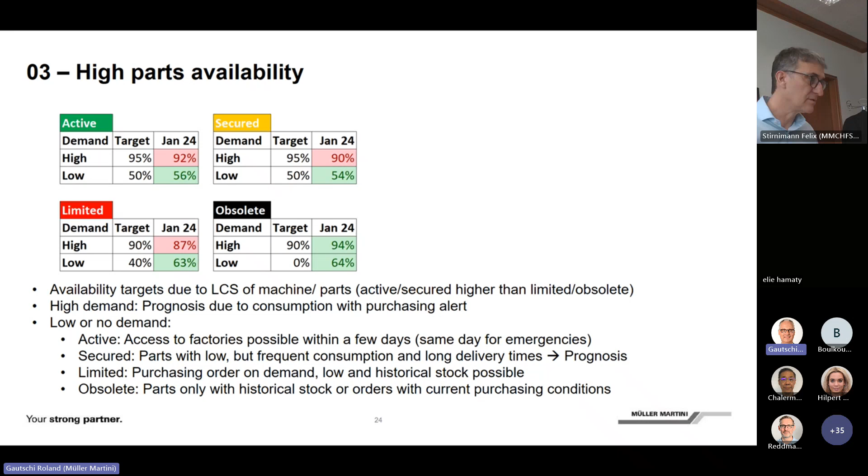But on the other hand, if we have limited machines, parts for limited machines with a low demand, then of course this is normally only on request, so we have these parts not in stock, and we purchase these only if we have a customer order. And on the obsolete side, of course, this is decreasing. Normally, this is fading out, and at some point of time, we do not support the customer anymore for such parts.

So Marie-Therese will again explain to you about the notifications that go along with the customer order. Yes, so now this slide indicates a timeline of email notifications once a customer has placed an order in our eShop. First of all, he will receive an order receipt that he has placed an order with us. Next, the order confirmation with the shipping date will follow, and maybe an update if a part on his order had no confirmed delivery date before.

If there is a delivery delay, he will also be informed. And once the shipment has left our warehouse, he will get a delivery notice and he can also track his order. And the shipment will be delivered in time, and we have a happy customer. The advantages here are that this process has a high transparency from order to delivery. Changes in planning can be considered, and we have a delivery performance of 90% with our logistic partners, which is quite good.

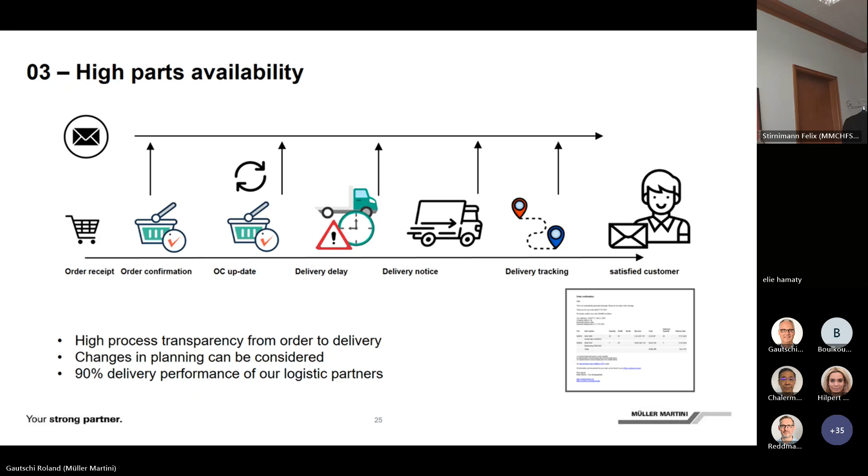Good. Thank you, Marie-Therese. I will summarize the high parts availability. On one hand, you have the eShop, accessible all year. You see real-time stock indication there. We have the confirmed goods in. You actually see the deliveries from our suppliers. You see as well the standard delivery times. And it has fewer errors than when orders come in via telephone or email.

About availability of active parts, we give this for sales active and service active machines for parts with a high consumption. We also intend to create kits for such parts that can be bought in advance or later on by the customers. We also take care of critical parts, that these are marked and in stock anyhow, despite a low consumption, for example. And of course, parts with frequent consumption are available with the prognosis. And we also take care that we have upgrades and retrofits ready for our active sales program.

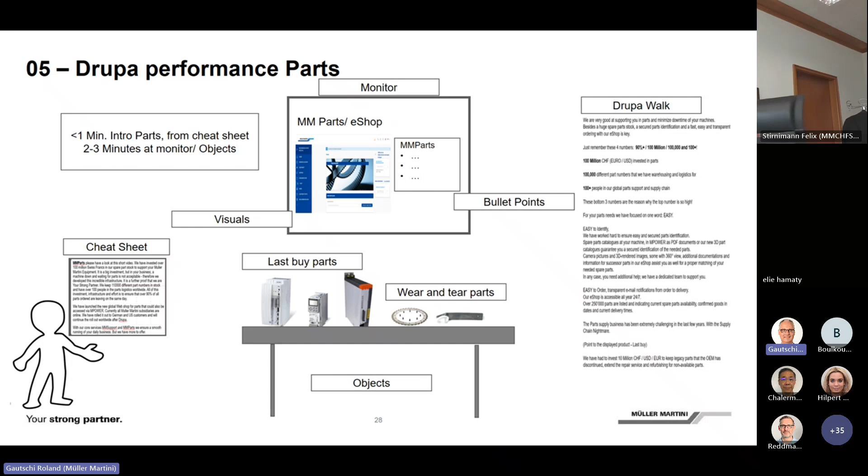For example, last buy items you can show to the customers and discuss a few things, or typical parts that you can show regarding availability or identification. This is also underlined with a cheat sheet you will get that will guide you through the MMParts section, so that you are able to give good information to your customers.

Good. I don't think there were any questions, as I see. There are some questions from PR. Okay. Can you check yourself, or shall I read it to you? Yeah, maybe you can read it. Got it. I got it.

PR was asking whether we can have access for customers in India, for the secured and limited category for LCS, and have MPOWER access only to identify parts and their availability without pricing. Now, PR, it's not that easy. The point is that you don't have B1, because B1 is the base of the machines. That's one thing. And in MPOWER, we have the documentation and the spare parts available back to 2015.

2015. That's the most of the machines that are secured and active that we have under the system. So, but I got the point. Let me think about it. We will come back.

Felix, PR here once again. Yeah. On some of the recent machines that you have sold, we see in the order confirmations MPOWER access is already given. So does it mean that for all the new generation machines which are installed from last year, the customer would have access to MPOWER?

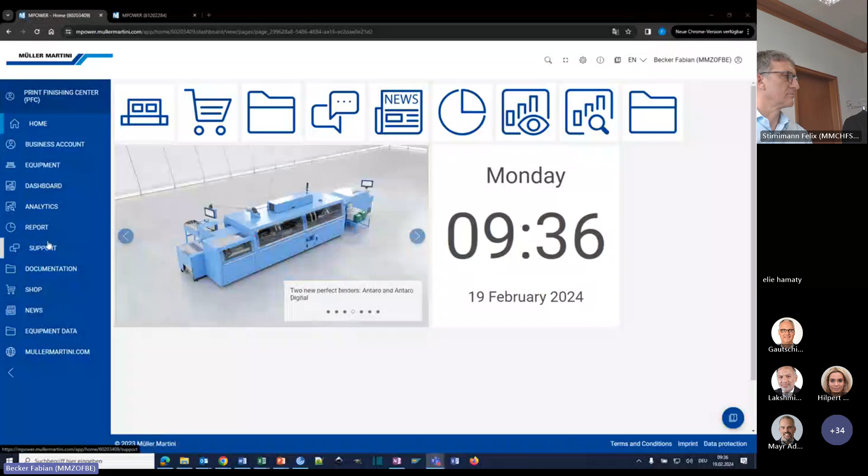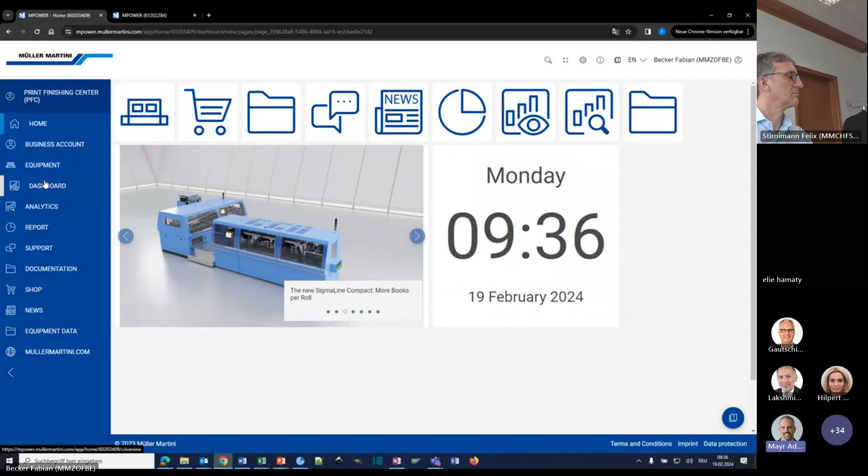Yes. Okay. So as explained, we have different modules, and a customer that has just MPOWER would see something like that. There are fewer modules, as you can see, and we have no analytics in MPOWER as a default. So the customer needs a subscription for the 3 modules: dashboard, analytics, and reporting. And if he has the licenses in B1, then it will be displayed in MPOWER. So these 3 modules are not part of the standard MPOWER. So basically, MPOWER is kind of a framework, and we embed additional modules into it, which are paid modules or paid licenses. Exactly. That's how you can call it.

Fabian, we have a sheet, an overview of which functions are available when. Exactly. Maybe we can put that onto the link that we're going to send out. We can do that. I can send you the link. You can find it on our website, please show it. müllermartini.com, MPOWER, modules, and then you have a table which shows which modules are available and where, and which ones are licensed and which not.

Okay. So basically, we have 3 categories. If you can scroll to the top briefly, maybe change to English. Yes, exactly, makes it a bit easier. So we have functionality modules which are free of charge. Whenever you have MPOWER, you have this functionality available. Then we have some functionality which is contract related, linked to a remote line or a helpline contract. And we have license related functionality. That's typically everything which relates to Connex, such as Connex Info Cloud Dashboard, Analytics, and the report. Exactly. And you also see in the availability where it is available.

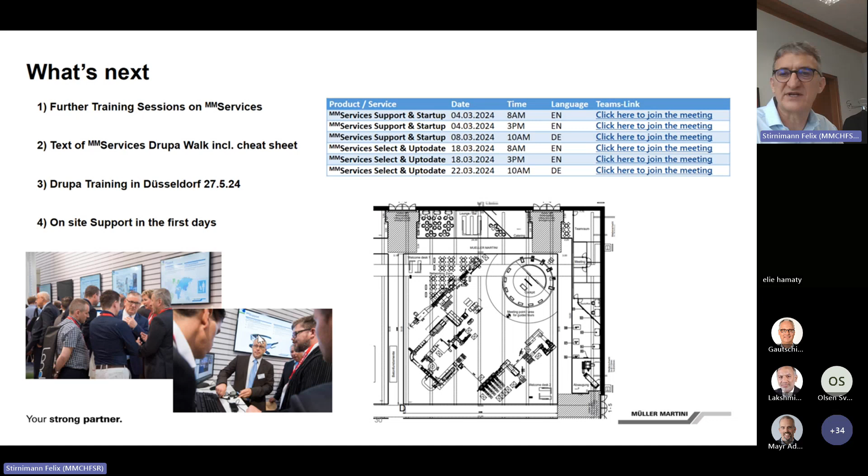Then during the first days, we have on-site support. The service directors or people from services are there so that they can support you and guide you through with the customers. This is for the first 2 days, maybe 3 days. By then you should be able to do that on your own. That's what we realized at the previous Drupas, that's the way it works. So you can listen, get yourself familiarized, and get better and better. And we just hope that a lot of customers are interested, but in order to do that, it's very important that you follow